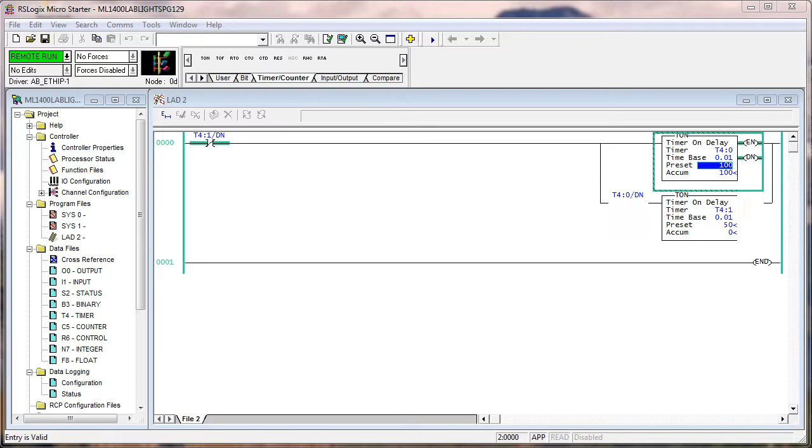That wasn't in the lab, but that's noticeable. Okay, add some more logic. With input 0 on, what you're observing is that the timer timing bit from T40, which is on for 1 second and off for half a second, is what is driving output 0. So your light on your digital field device simulator, output 0, that light is on for 1 second and off for half a second. Now, if I flip input 0 off, it looks like the same thing, but it's not.

Now, the timer timing bit for T41 is what's driving the light. So that light now, or that output 0, is on for the preset of T41, which is 1/2 a second, 50 hundredths of a second. And then it's off for 1 second, on for half, off for 1 second.

What idea you could get from this is if you have a light on your process or your machine that you want to flash, but you want it to flash at different rates, this is how you could do it. Just use some method of selecting which timer timing, if you want to call it pulse or interval, is actually driving the light.

The question was asked while observing output 0, is the lamp energized longer when input 0 is flipped to the on position or the off position? Well, when it's flipped to the on position. Why? Because the preset, hence the timer timing bit, is higher or longer than that for T41. So T40 has a longer preset than T41. So in the on position, now we're using the longer pulse to drive our light.

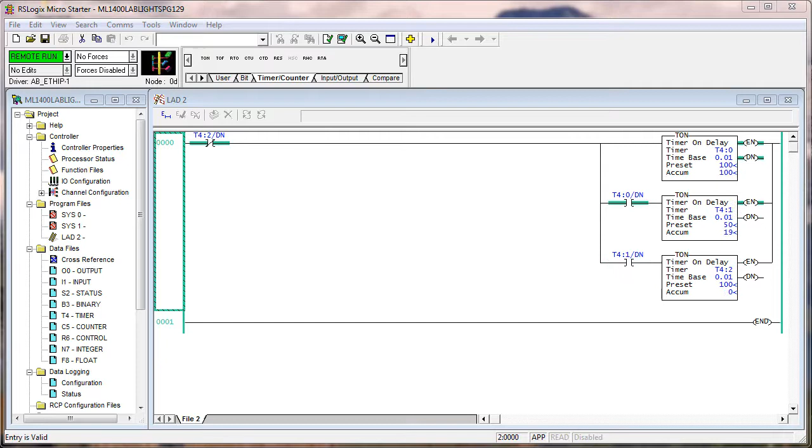We changed the logic a little bit. We added another use of another timer data type, T42. So we have 3 TON instructions. Enable the first TON instruction that addresses T40 with a preset of 100 or 1 second. When it's done accumulating, it enables T41 for half a second. When it's done accumulating, then its done bit enables T42 for 1 second.

When T42 is done, its done bit, which is used in the true if off at the beginning of the rung, goes false for 1 scan. Next scan around, it starts the process all over again. So if you watch the accumulated values here, you're watching 100, 50, 100, 100, 50, 100. So we've cascaded 3 TON instructions together addressing 3 separate timer data types.

If you had not changed the true if off from T41 done to T42 done, that would be this guy right here, if you had not changed that from 1 to 2, would T42 have been enabled? The temptation is to say no, but the answer is yes, because this is scanned left to right, top down. So on the scan, when the accumulated equals the preset, the done bit is turned on and enables this timer, but less than 1/1000th of a second later, it clears the whole rung. So you're never going to see it accumulate.

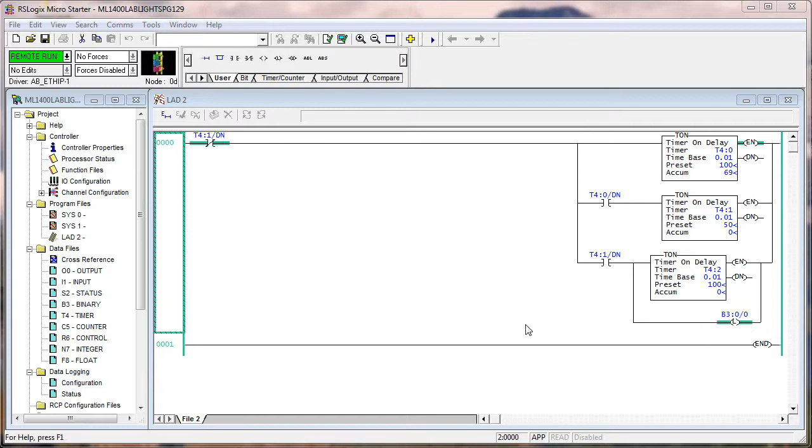So how would we prove that T42 is enabled? Well, you see right there, we didn't do this in the lab, but you've learned how to create a bit trap. So just to verify this, I'll toggle this, and you see it latches right back on. So I'm going to toggle this off right when T42 is complete or done. Well, it never starts. That's right, because we changed that to T41 up there, the true if off at the beginning.

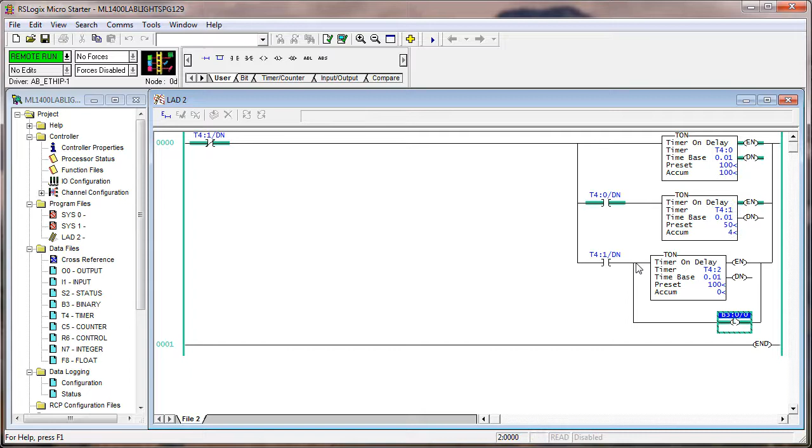So when T41 is timing, I'm going to change this. Better yet, I'm going to change it when T40 starts. See? So you see it being latched. So the gotcha bit here goes on. That proves that T42 was enabled because the rung was true. So this was true, enable the timer. One scan later, this is false and resets all three.

So I'm going to take that back out of there. That does not belong in there. But just to show you how to use a tool you've already learned about. Okay, see, we changed the logic. We added the use of some timer timing bits. And by the way, those timer timing bits and outputs don't have to be in the position shown. You could have added separate rungs.

In other words, you could have went down here and put in a rung looking at a timer bit and turning on an output. But we've already used these outputs, so we'll use 3. And we'll use this timer timing bit right here. I see it, so I just drag it down, finalize, and you see that light number 3 or output 3 is on at the same time as output 0. So I tend to compact everything together in one rung if I can, just to make it easier to analyze.

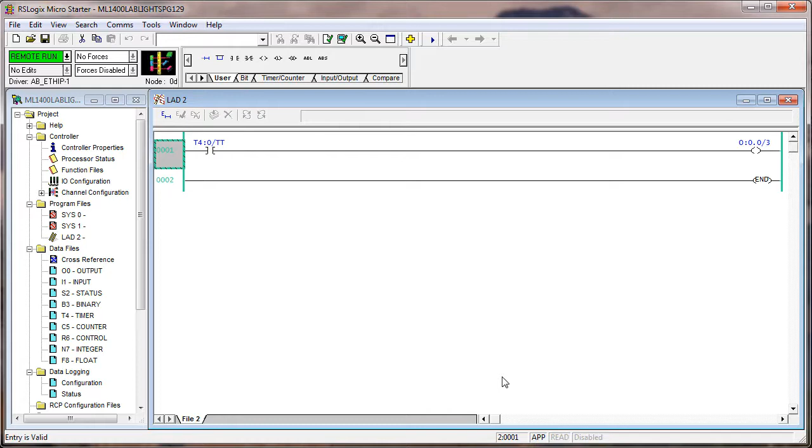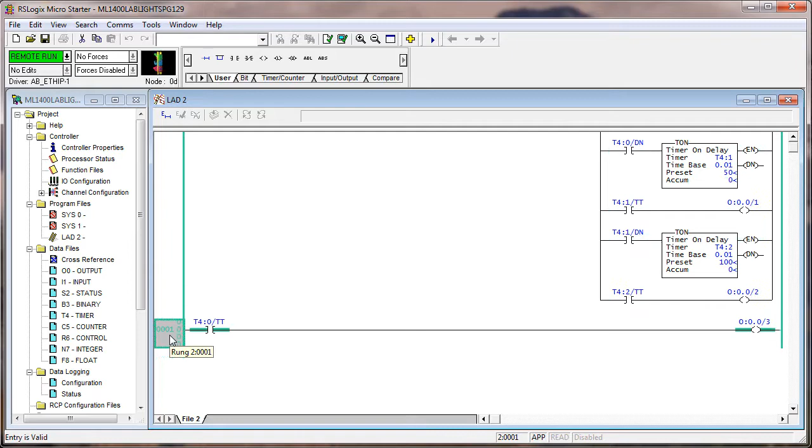Because if you were looking at this rung by itself, right here, you haven't the biggest idea what's controlling T40. Correct? I mean, that could be in another program file someplace. It's in the same controller. It's being executed in the same logic, but it's not right in front of you. So you can't see what is controlling, enabling, resetting, if you like, T40. But if you put it right in the same rung, then all the logic is apparent. I'll delete this. We don't need that. So I tend to combine the logic all into one rung to make it easier to troubleshoot.

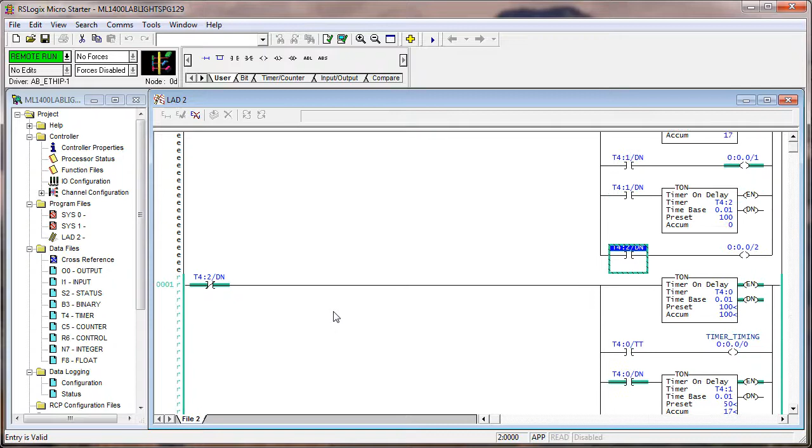If you converted all of the timer timing bits that are controlling the outputs to done bits, describe the sequence that you would observe. We'll just do that. So we'll make this the done bit, make that a done bit, and make this one a done bit. Okay, right now it's still behaving with the timer timing bits because this is the rung that's being run. See the green R's in the edit zone? And because this is an offline project animated by the online data, these outputs are still behaving the same. 1 second, half a second, 1 second.

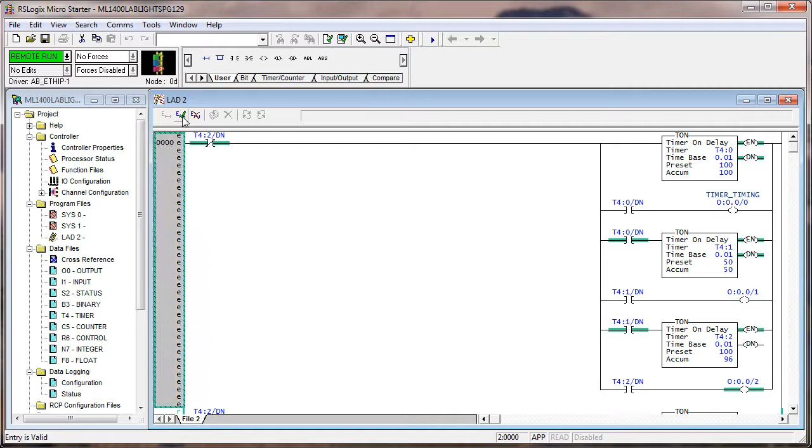Now, when I finalize the edits, because you're using the done bit instead of the timer timing bit, then output 0 is not on while T40 is timing, but it goes on when it's done. Also, when it's done, it enables T41, but output 1 does not illuminate while T41 is timing. It doesn't come on until it's done. And then when it does come on, that enables T42. And since we're not using the timer timing bit, output 2 appears never to come on.

But you know from the previous lab that actually output 2 is being energized, or that bit addressed by O:0.0/2 is being set to 1 for one program scan. Next scan around, the rung goes false and clears everything. How long would output 2 be illuminated? Well, one program scan. If the bit is on for one program scan, would the light ever be illuminated? If you apply power for less than 1/1000th of a second, there was current there, but it was never illuminated in the sense of seeing light. This is referred to as cascading timers.

What bits you use to control outputs, that's up to you. You can even compound the usage of these bits. For instance, I'll put this in the edit mode and I'll put in a true if off. Then I'll use T41. Throw it up there, finalize. Now you see output 0 is only on for half a second, because if T41 is done, that's a half second has elapsed. We see output 0 on until output 1 goes on, and then they're both off. They're both on for half a second each.

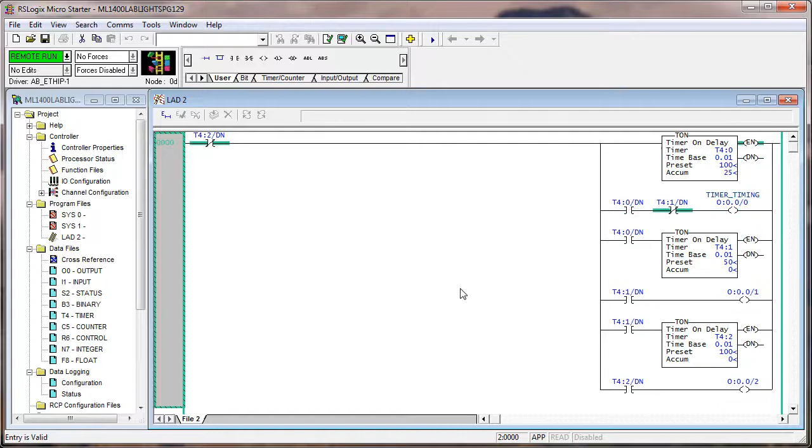Now, why would you do this? I have no idea. But this is meant to show you how you can use the control bits to time situations or create pulse trains. I'm going to delete this instruction to put it back the way it is in the manual.